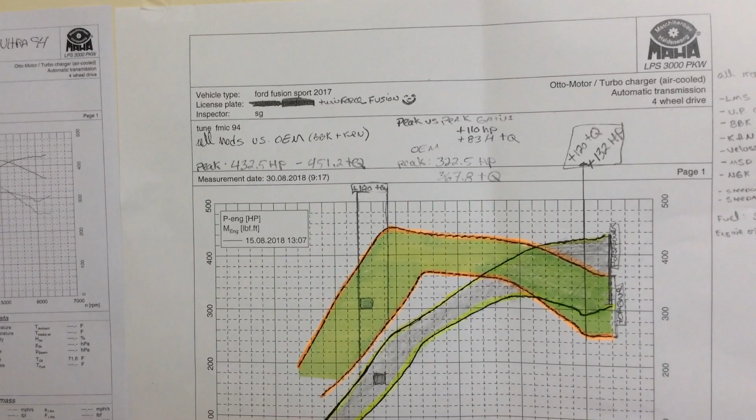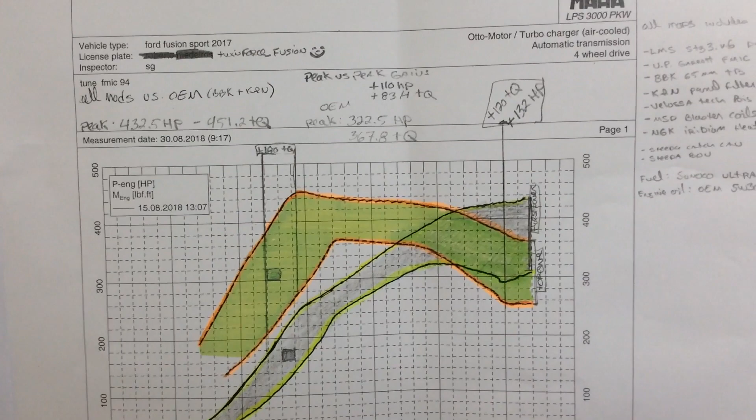Yesterday I shared information regarding the dyno, the gains I did with the front mount intercooler, with tune and without the tune. I had a nice lengthy chat with Matt from Ultimate Performance, those of you know him as Dark Star in the Ford Fusion forum. Like me, he was ecstatic. He knew the thing has a lot of power, it's just unfortunately he didn't have somebody to independently test it on the dyno.

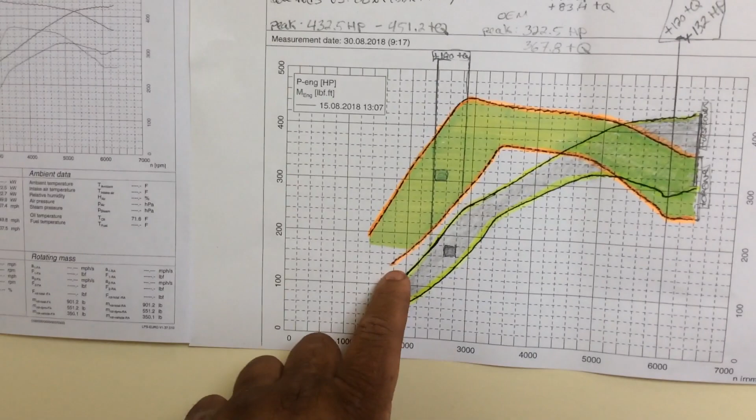Now what you have in front here is tune with basically all mods versus tune only with the BBK and filter. Now let me go down the list.

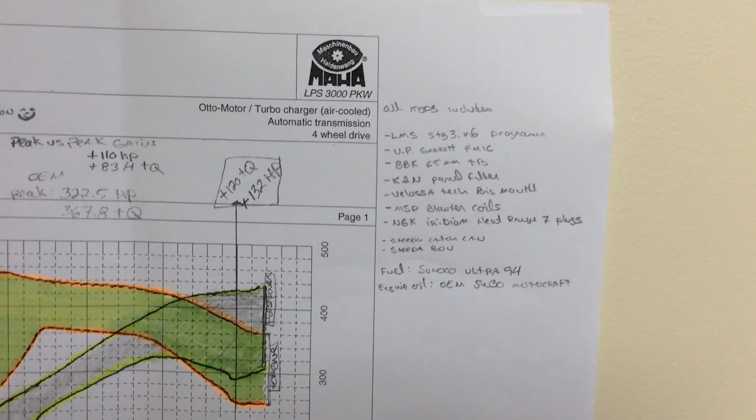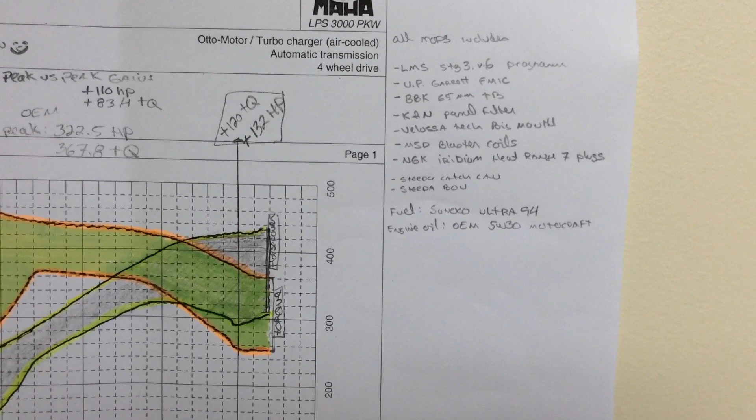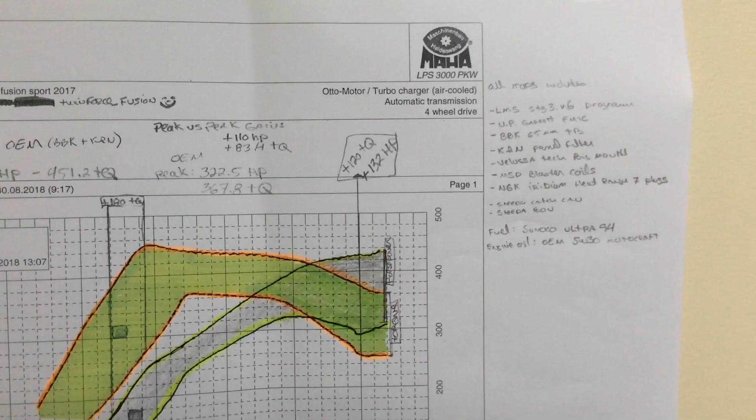The top orange and the top yellow, this is all the mods I have. So I got the Livernois Motorsport Stage 3 version 6, the Ultimate Performance Garrett front mount, a BBK 65 TB, the K&N panel filter, the Velossa Tech Big Mouth, the MSD blaster coils, the NGK Iridium Heat Range 7 plugs. I also have a Steeda catch can and a Steeda blow-off valve. I run Sunoco Ultra 94, and the engine oil is the manufacturer's 5W30 Motorcraft. Nothing fancy there yet, one day it's gonna be AMSOIL, but I'm not there yet.

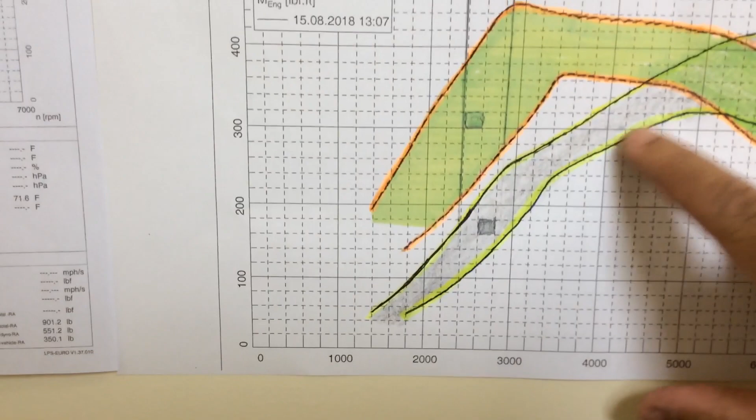Now, when I originally did my dyno without the tune - because this here, gents, it's without the tune, this yellow line here, and this orange line and yellow line - peak numbers were 322 horsepower and 367.8 torque. Okay, that's the power the engine had.

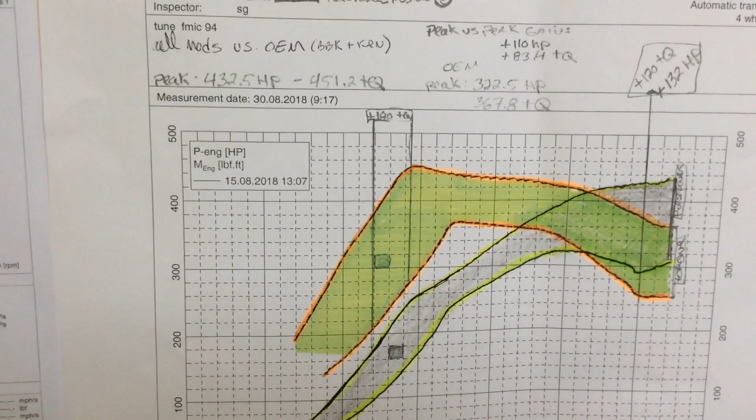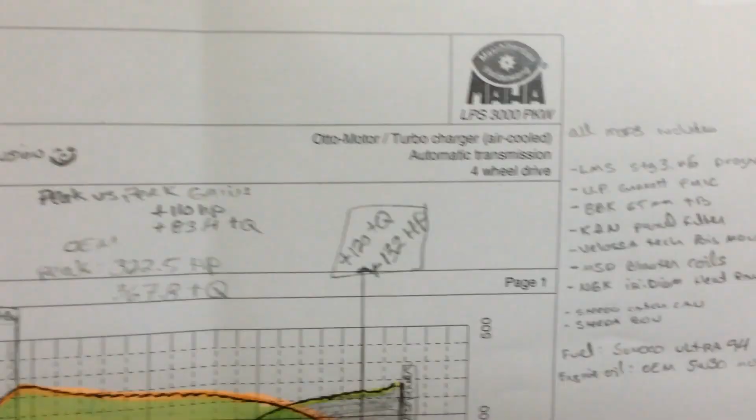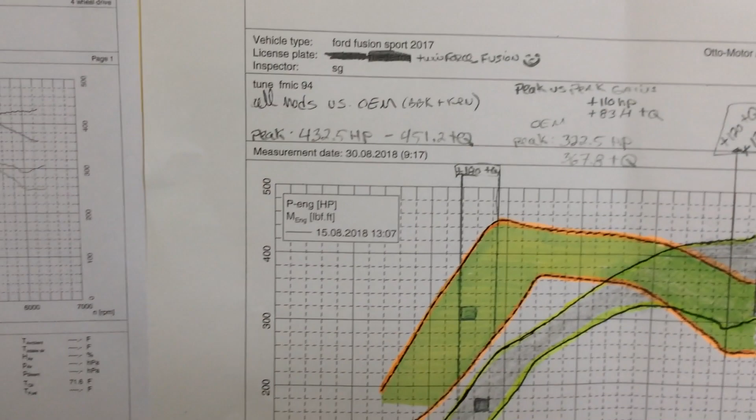Today, with the front mount and the tune, and well, basically everything on this list, peak is 432.5, which is a gain of plus 110 horsepower, and torque is 451.2, which is a gain of 83 torque.

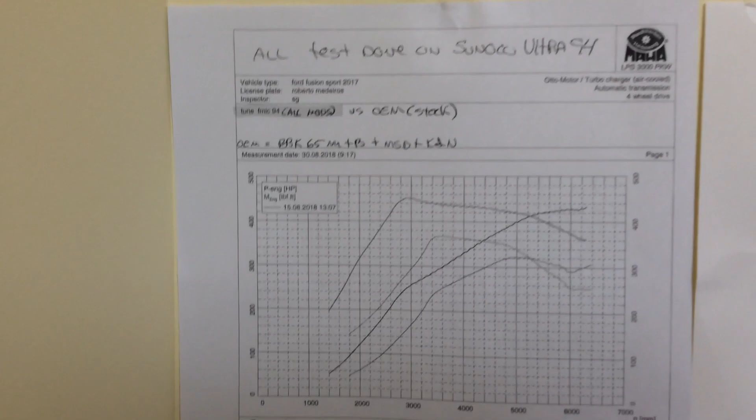But peak numbers, you know, say something. By the way, this dyno here, it's exactly the same than this one, it's just I blew it up. I did a ratio of plus 129%, and I had color for you to see the massive gains, basically.

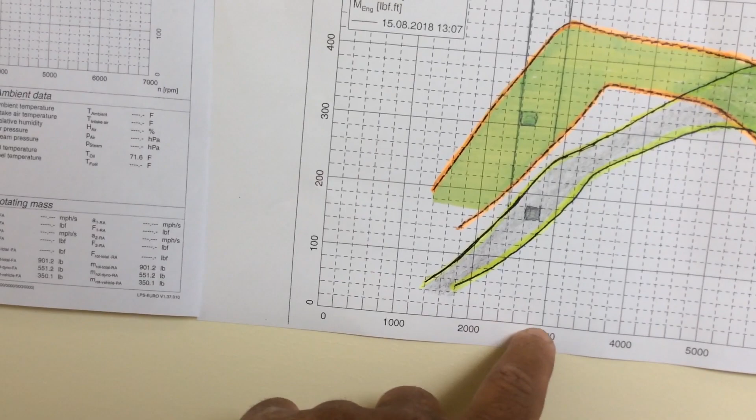And when I say massive gain, I'm not exaggerating. If you look here between 24 and 28 RPMs, you have a gain of 120 torque.

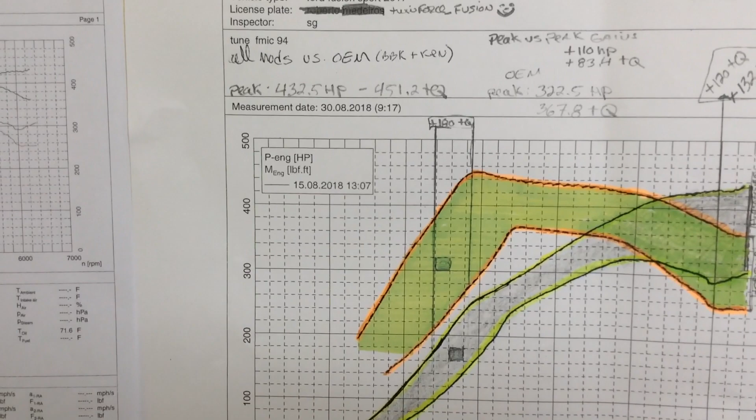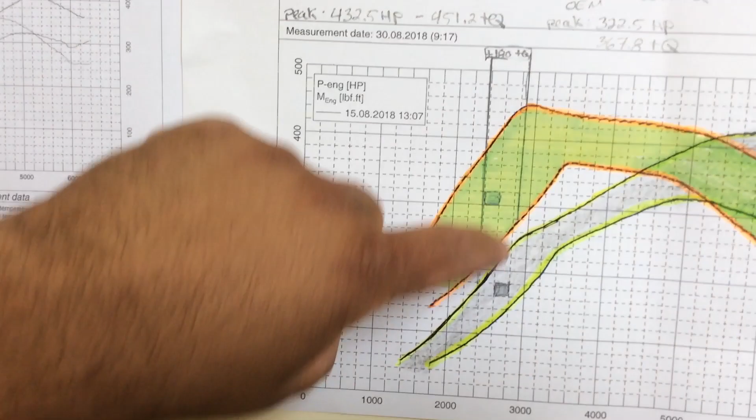Now on my old Impala, when I did my tune data log, I actually did 2 data logs, trifecta, which was very good with me - intake, exhaust, header, intake spacer, everything. I had some gains on the bottom of 100 torque and 80 horse. Not 120, but still on a naturally aspirated engine it was good. And it showed because my best 0 to 60 was 4.95 on the Impala.

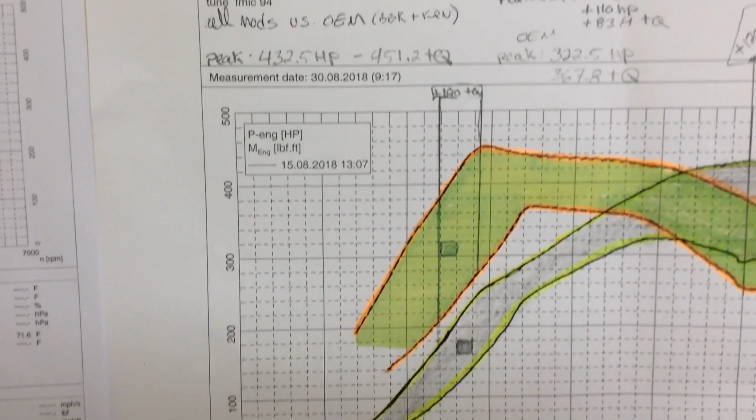Anyway, so go back here. I also darkened a square on each - this represents 20 horsepower and 20 torque. That's why I said that. But you could see here under the curve, we're talking about 120 pounds of torque.

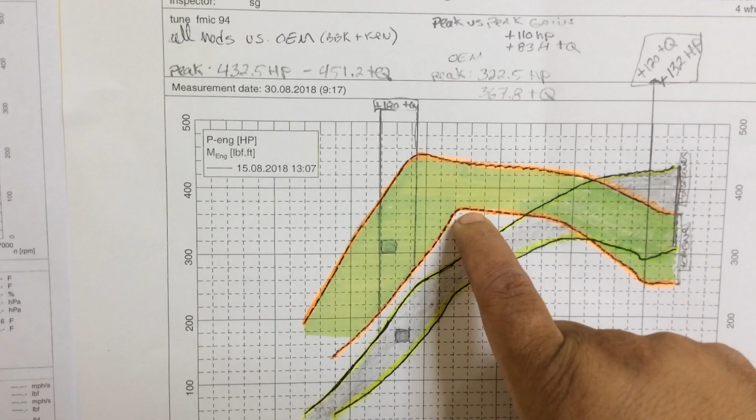And that's what I was saying yesterday, the instant torque you feel on this thing, it's amazing. And it carries on - yes, there's a peak of... correction, 367.8, because this one does not have the tune. And it carries on, you could see it's massive.

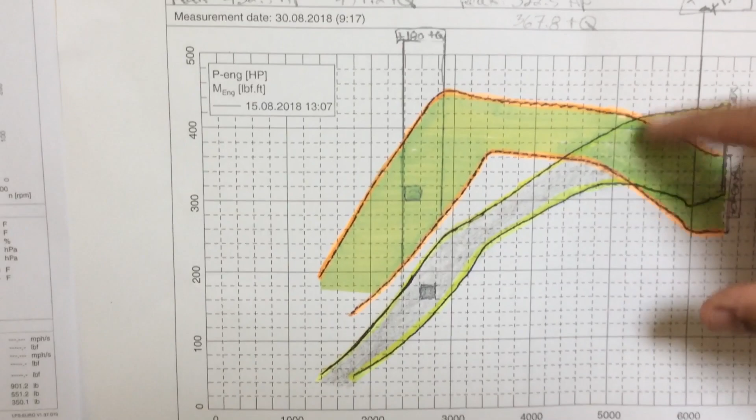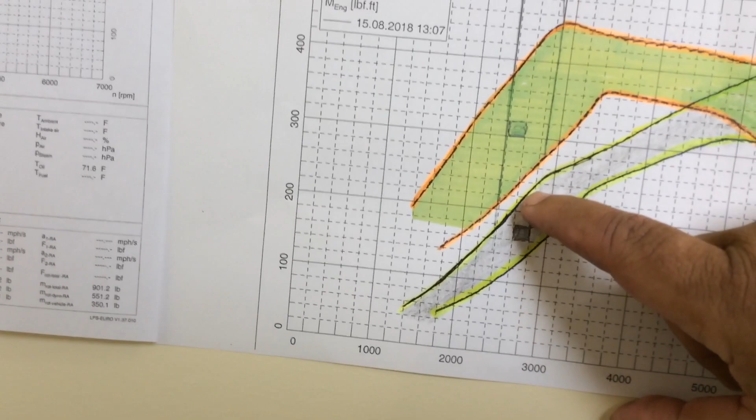We're talking about 26, almost 80, 60 to 80, 90, 100 of gains all across. And the horsepower, if you look on the bottom, like at 29, you have like 100 horsepower more. Okay, so this is huge, gents, this is huge. But look at the end, towards the end, at 6,000 RPM, I mentioned that yesterday, you got 132 horsepower more.

At 6,000 RPM and 120 torque more. That's why I say it just pulls and pulls and pulls, and it's a nice feeling.

Now, once I get the downpipe - I'll do the same thing. Where are we gonna go from here? I have no clue. The only thing I said cats, I should have said downpipe, sorry.

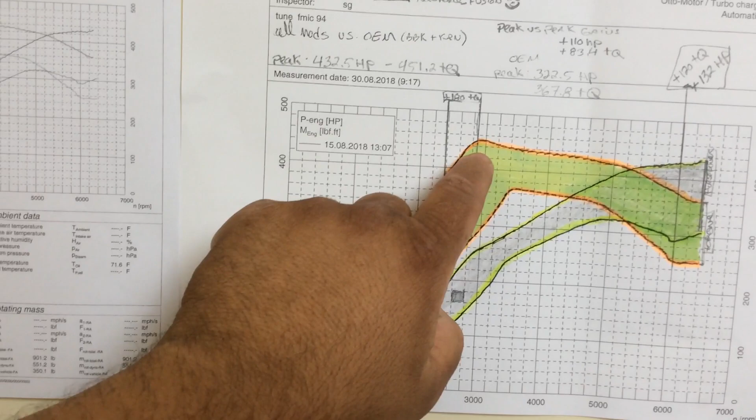The only thing I would love - I don't mind this thing, like maybe probably it's gonna be a little lower, but it's gonna pick up from here, and same thing with the horsepower, it's probably gonna pick up. We'll see. But again, I don't mind losing a bit under the curve with the downpipes, but I don't see how those downpipes will make me lose power. It's actually the opposite.

I sent all this information obviously to Matt at Ultimate Performance. He told me he was probably going to post it on his forum, whatever, which is fine, I have no problem.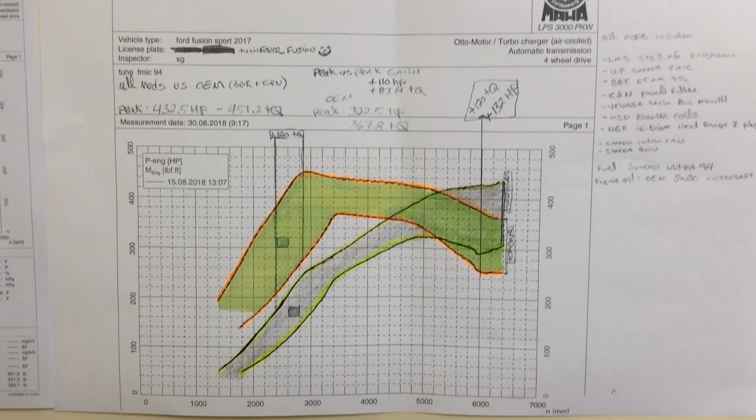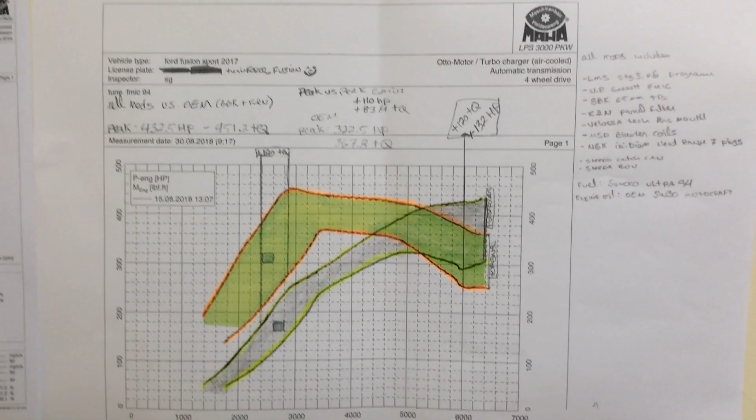I sent also all this information to Livernois Motorsport. Now I got to be on record with this, because originally when I did the tests, no tune versus tune, I sent all the information, I never heard feedback from them. And same thing, I sent them this morning, I sent it early this morning - we're at like 6pm right now, I sent it probably at 8am this morning, when I say 8am I'm talking about New York time, Eastern time, all right? So never got a thanks or hello or whatever. The reason I keep sending it, hopefully we'll get maybe a version 7 or 8 or 9 with it, would be nice if that's possible.

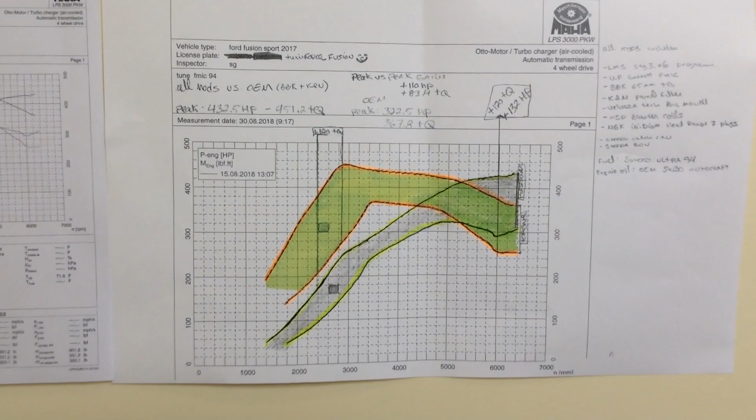But I cannot complain so far with the tune. So there is, guys, this is what - basically bolt-ons. I mean, the hard work really is the front-mounted intercooler. You have to remove the bumper, but there's no cutting, no welding, nothing.

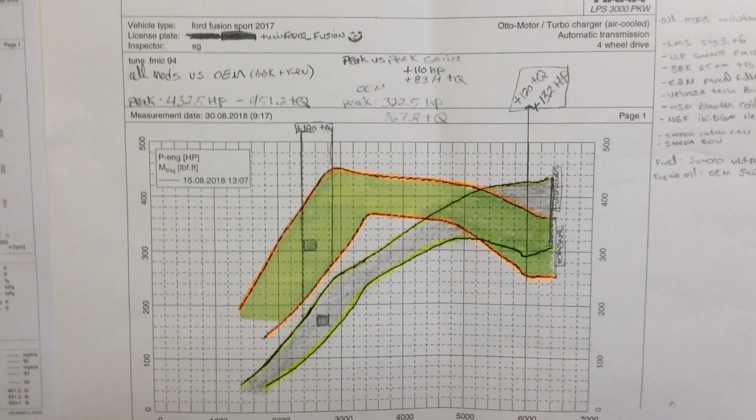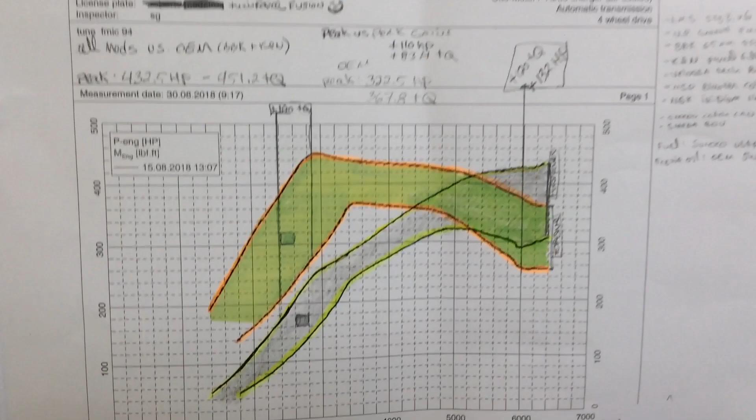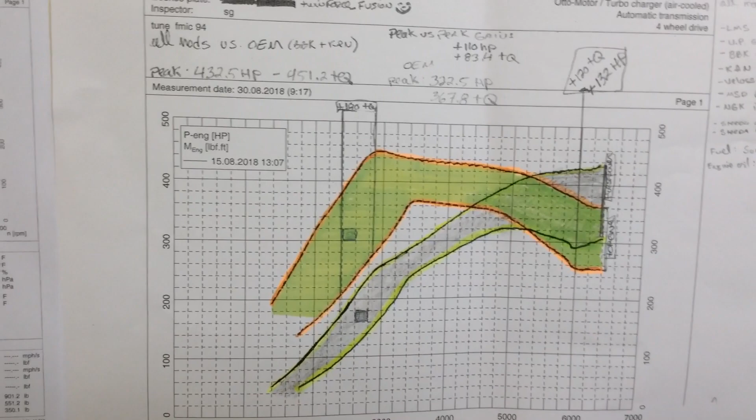So you need tools, but you need the normal tools, you need some torque wrenches and stuff like that, but usually it's standard tools. Just a heads up, if you're gonna do the top engine transmission mount, there's some screws where the battery tray is, kind of hard to get, so just be patient. And the reason I say that is I don't know if the factory mounts will handle all that power - like I said, I already broke one just with the tune, and the tune did not give this massive...

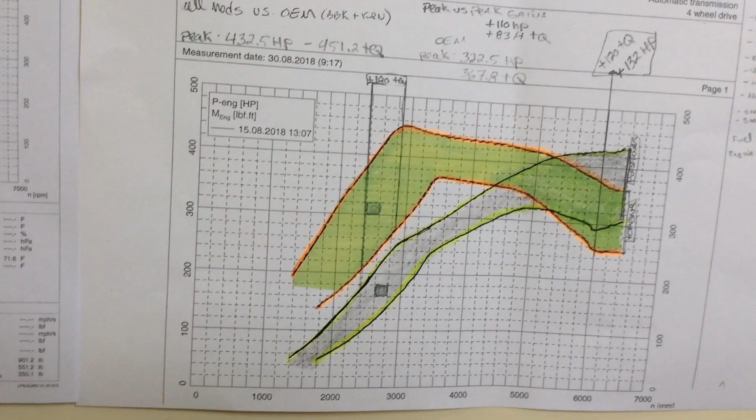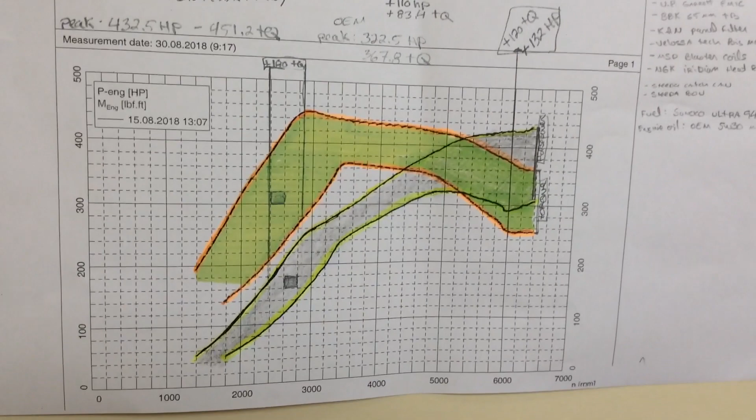Oh, speaking of that, I went to drive yesterday - man, it pulls, no jump, no wheel hop, no spinning, which to my surprise.

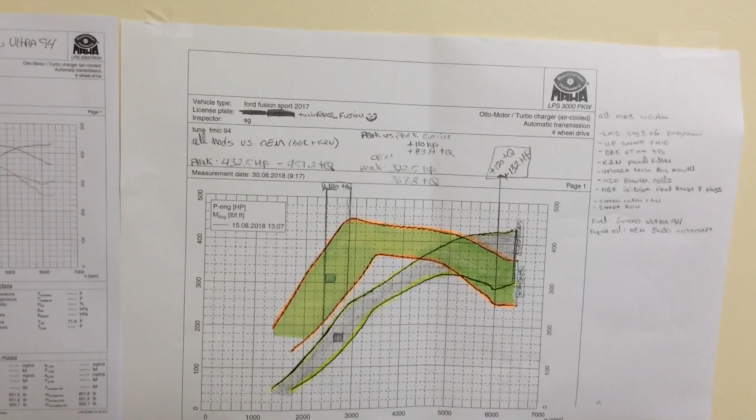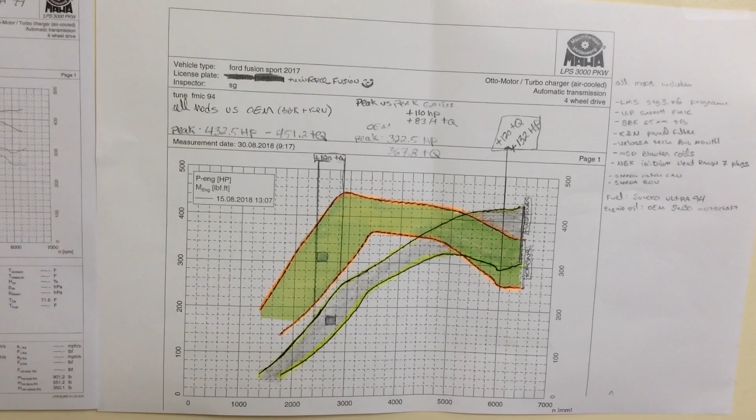So it's too bad this weekend the track is closed for street cars, it's only the race cars because there's a jet truck and stuff like that. So it's too bad I won't be able to try the car. But 2 Saturdays from now, it's Mustang Day, so it's gonna be time to feed, and I'm gonna go there and feast away on horses.